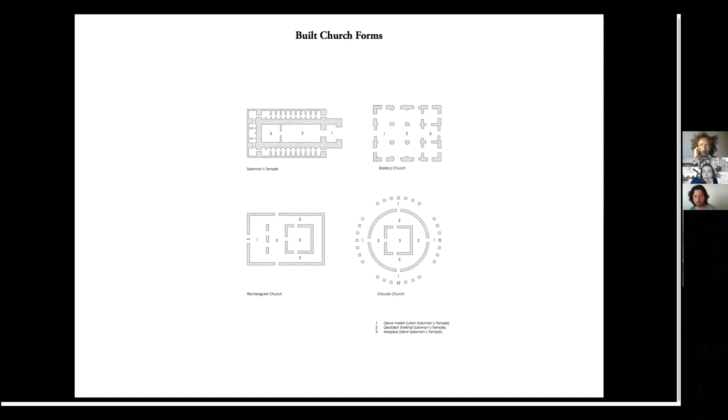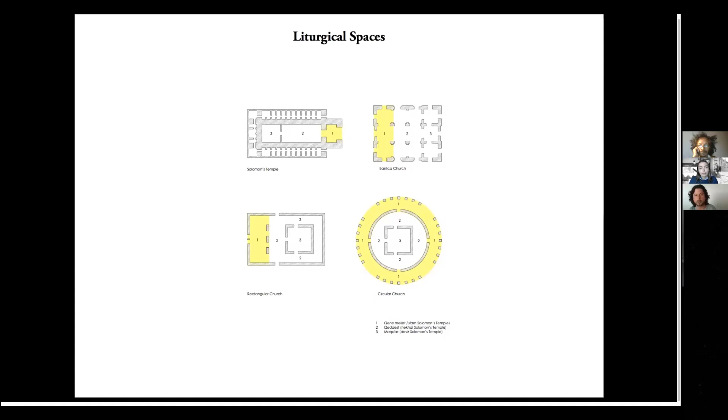Basically every Ethiopian church includes these three key religious spaces. The first is the Qene Mahlet, the entrance or anteroom to the church, which corresponds to the Ulam in Solomon's Temple. The second space is the Qeddest, or the body of the church, and the third part is the Maqdas, or sanctuary. Every church includes these spaces, and it's almost always oriented towards the east.

Within the Maqdas, the sanctuary, there's a Mambara Tabot, which is an altar, and on that you have the Tabot, a replica of the Ark of the Covenant's tablet, found within every church. It's the Tabot which is consecrated, not the church itself, so if the Tabot were moved from that church, it would effectively lose its sanctity in some way.

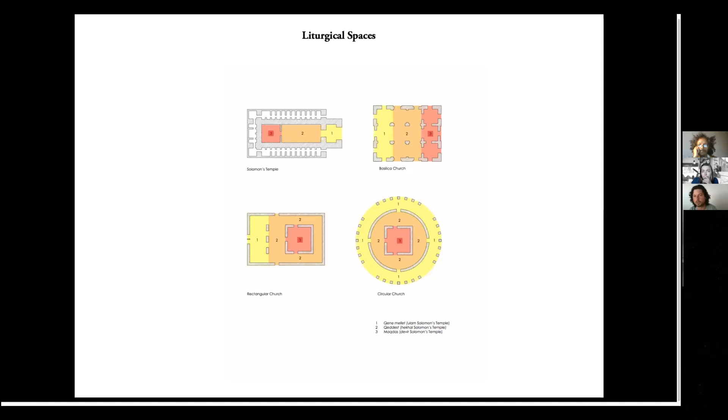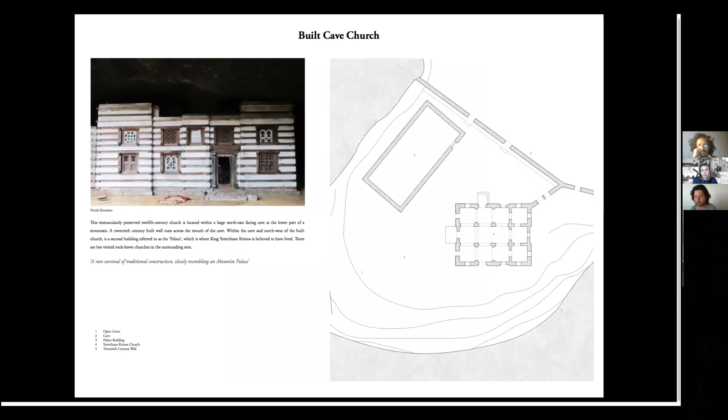Moving on from built churches, this is the example I showed earlier, but the reason this church survives is largely due to the fact that it's located within a large cave, and this dates from the 12th century.

A possible progression from this is a built church within a cave, but in this case the rear of the cave and the roof overhead have been carved as well. On the left you've got the built nave at the first church at Yemrehane Krestos, and on the right, built columns below, but the roof of the nave is actually carved from the mouth of the cave.

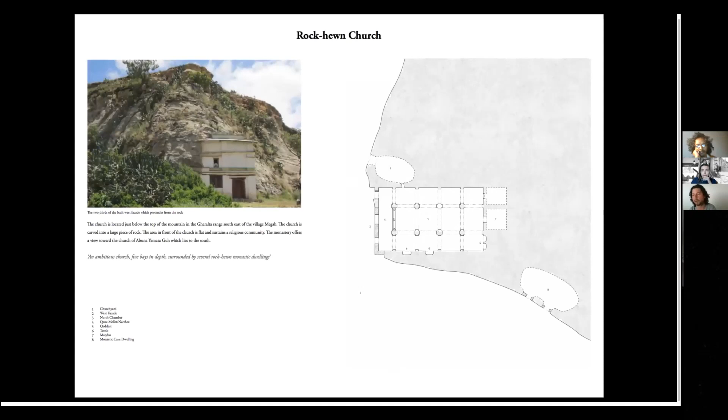Moving on from that, you then get a completely rock-hewn church. In this case, it seems that the front of the church has possibly fallen away and been built up, but it's effectively within the rock.

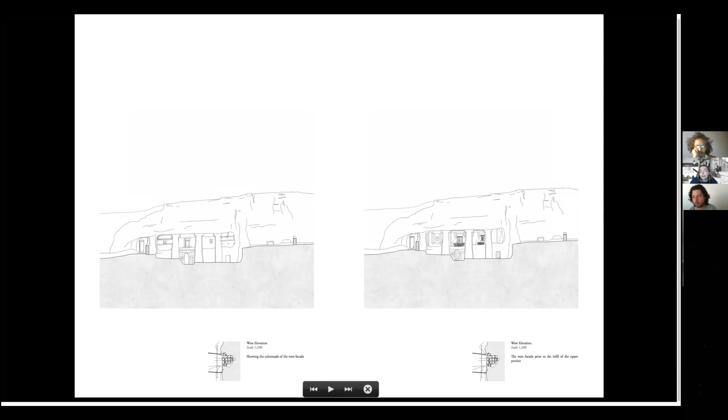While the plans are very useful, I think section drawings are probably really helpful in explaining these churches, just showing how they sit within the rock face of the landscape.

This is another church, the church of Mariam Bahara, located at the bottom of a large cliff. In this case there's a large frontage structure which has been built later, effectively doubling the size of the church. As at many others, the paintings have been whitewashed over, possibly due to a fire at some point.

In 2015, I was actually able to visit this church while there were two British wall painting conservationists busy uncovering the paintings. The Tabot was temporarily moved to another church, which meant I had free access and unlimited time to spend within the church.

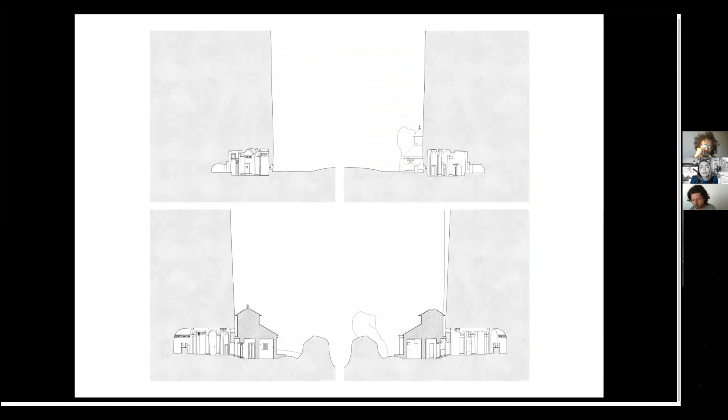Again, these are section drawings just highlighting the relationship of this church at the foot of this large cliff.

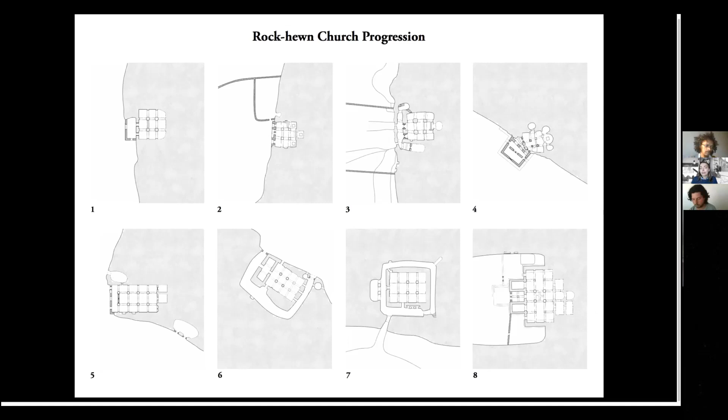Finally, you get these monolithic churches, which are more well known, as at Lalibela, which are cut completely downward into the rock and fully exposed.

As William mentioned, I returned to Ethiopia in 2016, or I've been returning since 2016, working with Michael Gervers on an Arcadia-funded project, also with Toronto University, and this has been part of a much larger team.

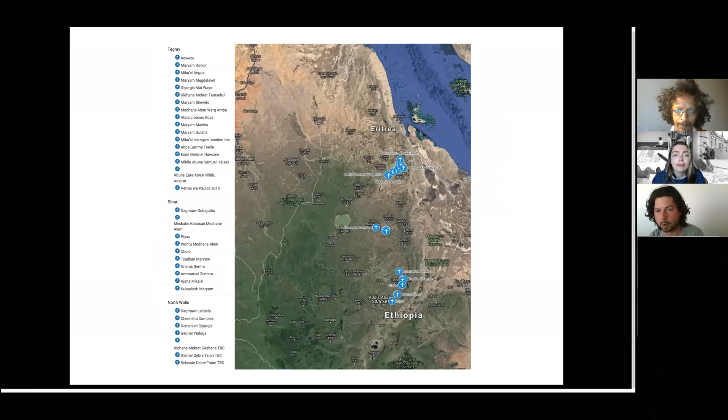It's important to note that the researchers identified 3 key areas: Tigray in the north, Shoa, and North Wollo, both in the Amhara region. There seem to be these 3 main clusters of new rock churches.

It's worth adding that the phenomenon of new rock churches really seems to have happened within the last 30 years. There's no evidence to suggest that churches were being carved before that. The common understanding is that they were carved possibly until the 15th century, and it seems that within the last 30 years there's a revival. A big part of this research was to try and establish whether this is the case, or whether there was a continued, unbroken tradition.

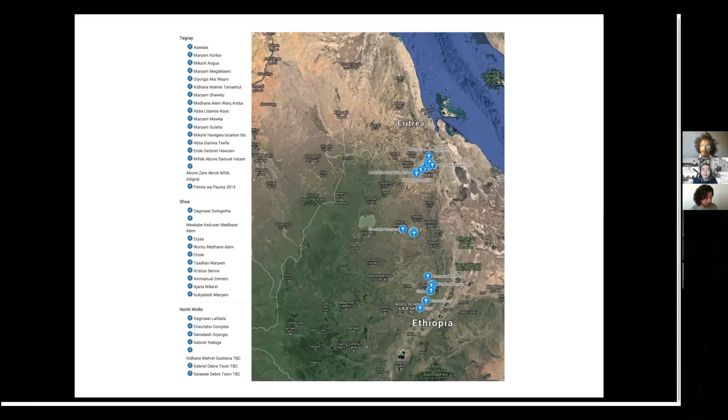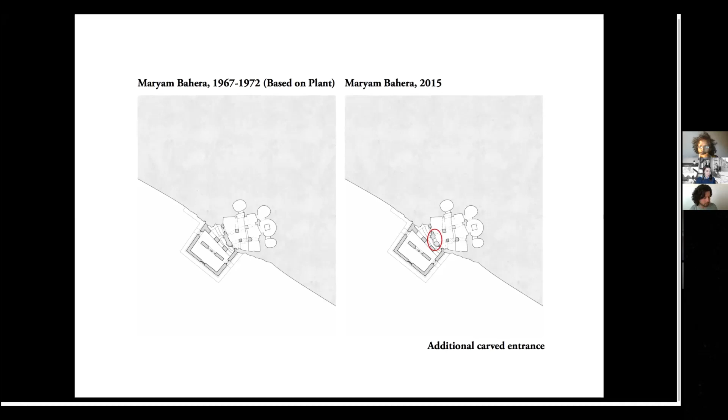Arcadia-funded research has fortunately yielded a significant number of active craftsmen. Those in the Amhara region tend to be solely driven by religious vocation, often choosing to distance themselves from society and carve single-handedly. Typically, as work progresses, support from the community grows and contributions are made in the form of provisions. In contrast, craftsmen in Tigray are often employed on a contract-like basis by a representative of the church or local community. This has led to the emergence of master craftsmen, individuals who have worked in several churches.

The process of creating a rock-hewn church has long been assumed as top-to-bottom excavation. The initial point of entry later forms an upper window as the craftsmen continue to carve the church below. At the freestanding courtyard churches of Lalibela, both exterior and interior are thought to have been carved simultaneously in this manner. While the majority of newly identified sites do employ this method, the opposite has also been recorded. At Maryam Shewito in Tigray, having broken into the rock by means of an entrance, the excavated slag forms a platform from which the craftsmen continue to carve overhead. On achieving the desired height and having completed any carved patterns to the ceiling, upper walls and column shafts, the slag is then removed to expose the church in its entirety.

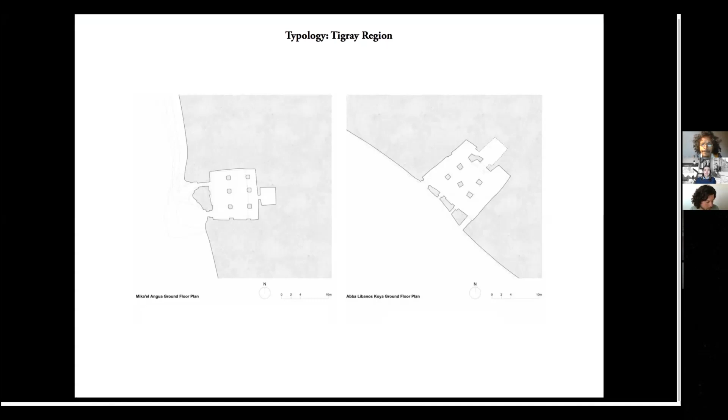While most new churches in Tigray borrow their form from the basilica, churches in Amhara do not. These southerly churches tend to lack a level of sophistication and attention to detail, evident in old rock-hewn churches. Exceptions are the church at Etysa, Meskabe Kedusan Medhane Alem near Sela Dingay, and the ambitious Dagmawi church complex near Gashena. The church plan at Etysa is noteworthy, as it is the only rock church to reflect the relatively recent Ethiopian rectangular built church, a development of the basilica that places the Maqdas centrally rather than at the far east.

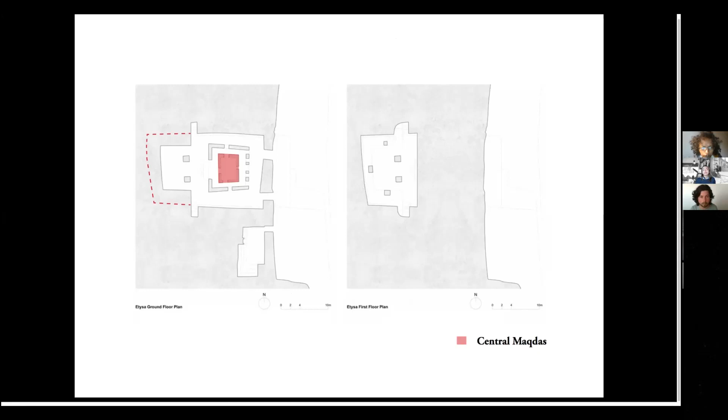This is a site near Gashena in Amhara, called Dagmawi Lalibela. In addition to a religious motive, the Dagmawi Complex demonstrates a strong political and social agenda. The principal craftsman, Gebre Meskel Tsema, describes the project as a reaction to views that question the authenticity of the churches at Lalibela, suggesting that foreigners were responsible for their creation. By understanding the immense task of carving 10 churches using primitive tools and techniques, he hopes to demonstrate that Ethiopians were and are capable of carving such structures. The Dagmawi Lalibela complex strives to restore a sense of pride and traditionalism in the Ethiopian way of life, and to educate and remind Ethiopians of the importance of their heritage, something rapidly being lost to Western influence.

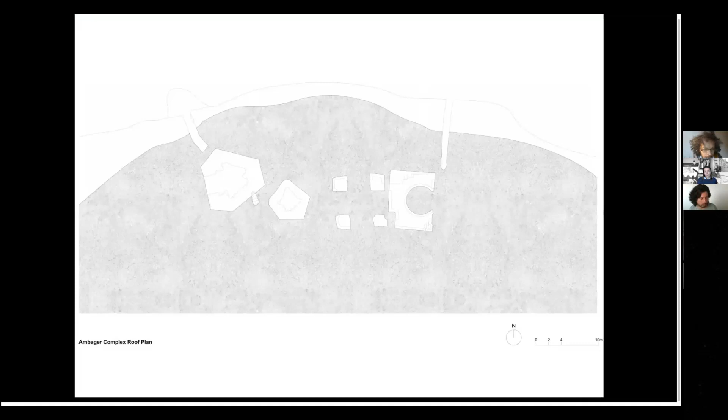The abundant relief carvings continue this argument and form a narrative of the past and present achievements of Ethiopia. The Dagmawi Lalibela complex presently consists of 5 subterranean churches, connected by open courtyards, short passageways, and trenches - quite comparable to nearby Lalibela. The site demonstrates a high level of craftsmanship seldom realized in newly carved churches. The variety and unusual arrangement of spaces reflect a willingness for experimentation, and the church ceilings and courtyard walls are richly decorated in hieroglyph-like carved relief.

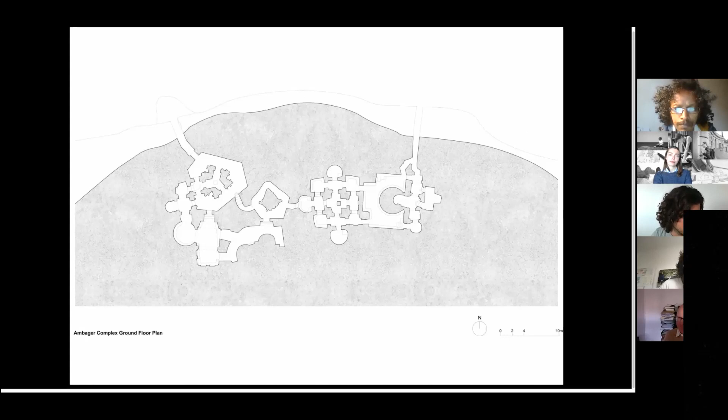Primitive metal tools are sharpened over a fire using bellows. The precision of the ceiling dome is achieved by fixing a piece of wood centrally in the rock. A piece of string is attached to the wooden spoke and used to mark out the circular dome. This method was quite possibly employed in older churches adorned with domes and cupolas. The excavation of rock and intricate relief carvings is done without artificial light. No drawings are used.

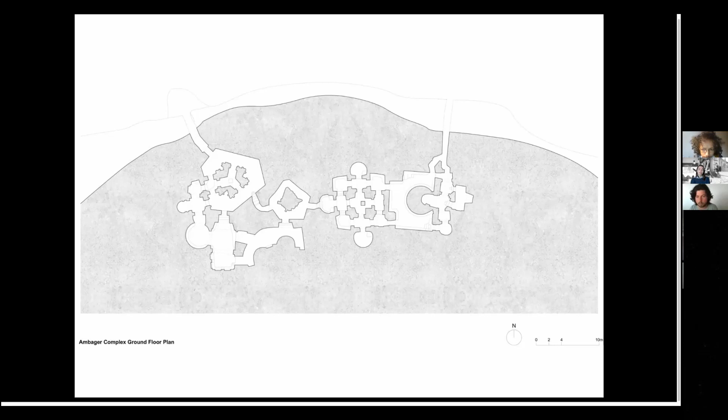The level of craftsmanship evident at Dagmawi Lalibela, and indeed the phenomenon of newly carved churches throughout Ethiopia, reflects the level of craftsmanship alluded to by Richard Sennett. Every good craftsman conducts a dialogue between concrete practices and thinking. This dialogue evolves into sustaining habits, and these habits establish a rhythm between problem solving and problem finding.

So I'm going to quickly talk you through the Dagmawi Lalibela complex. You can see that there are 5 churches. There are a lot of section drawings. It's the largest complex of churches, of new rock churches.

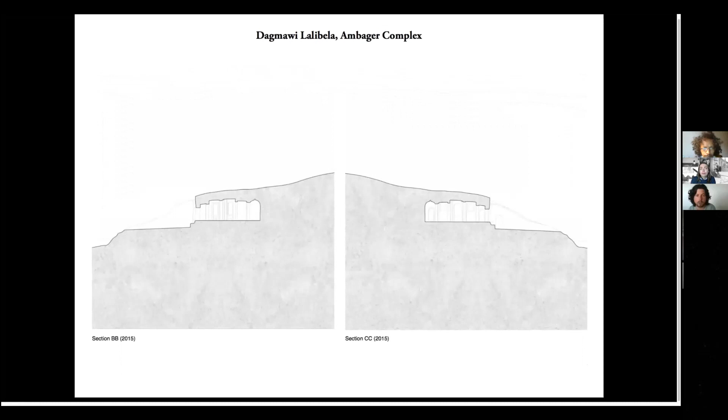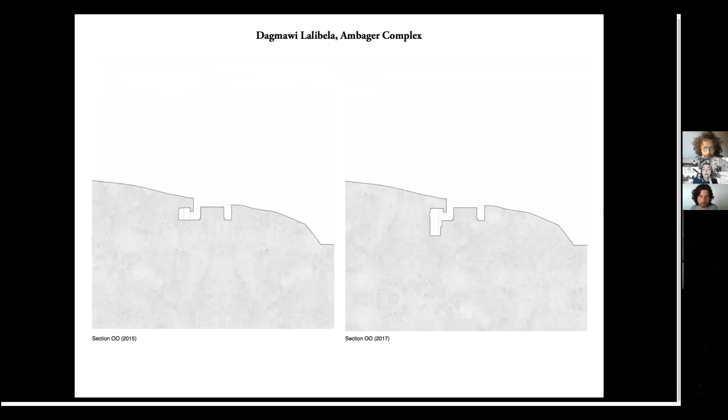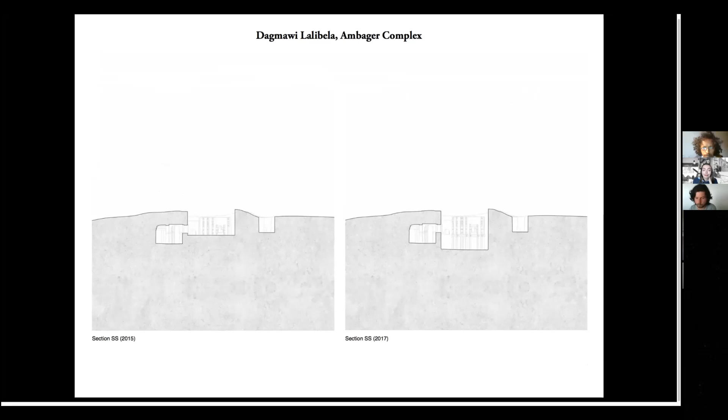These images, this and the subsequent ones, show on the left 2015 and then 2017, comparing survey drawings. You can see the ongoing excavation.